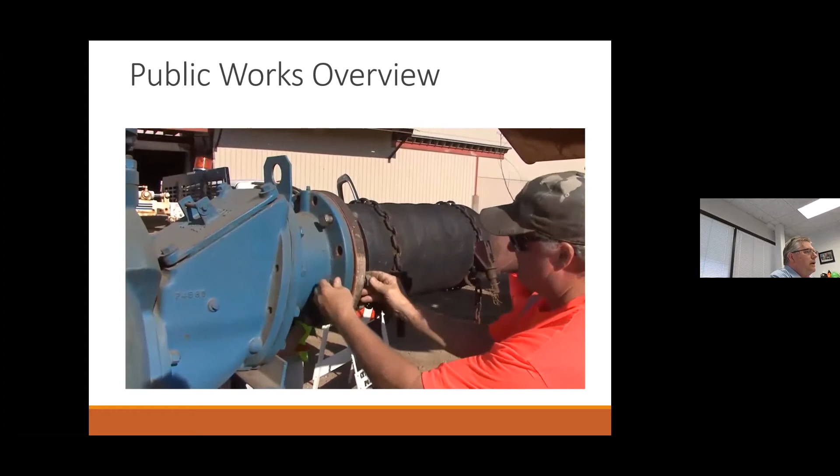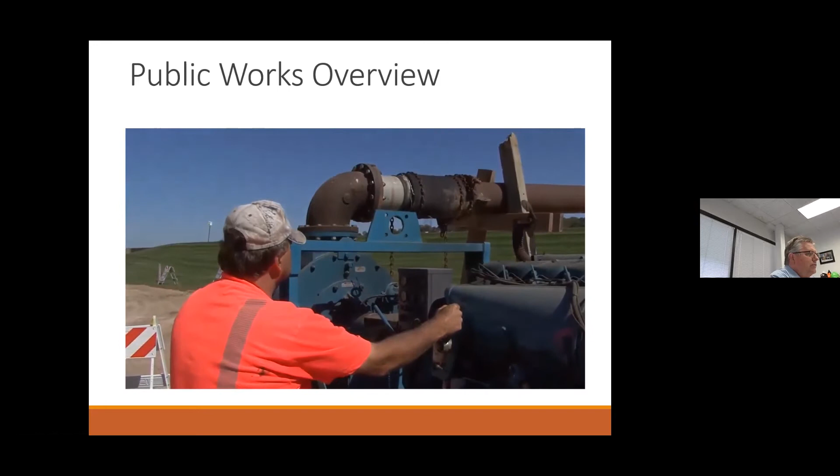Public Works Department provides the operation of the flood control system. There's 3 permanent pumping stations and 1 temporary pumping station. This was a demonstration project that we put together. We have over 20,000 feet of those temporary barriers, those HESCO barriers, available to us in case we would need to use those.

These are the ice harbor gates down in the Port of Dubuque.

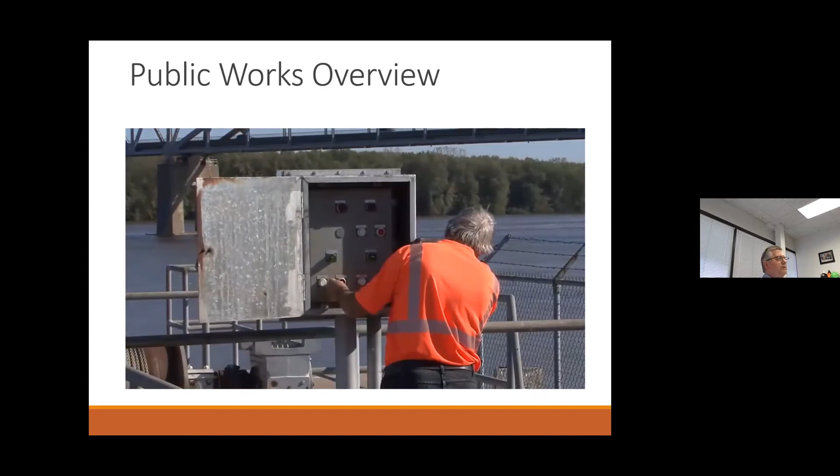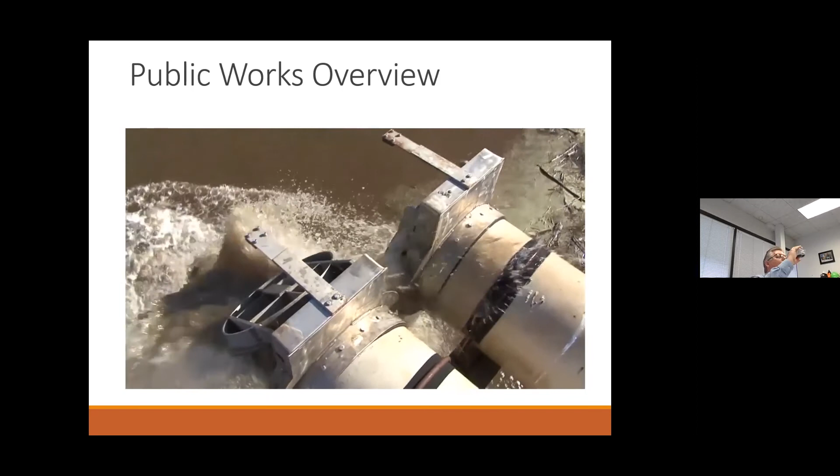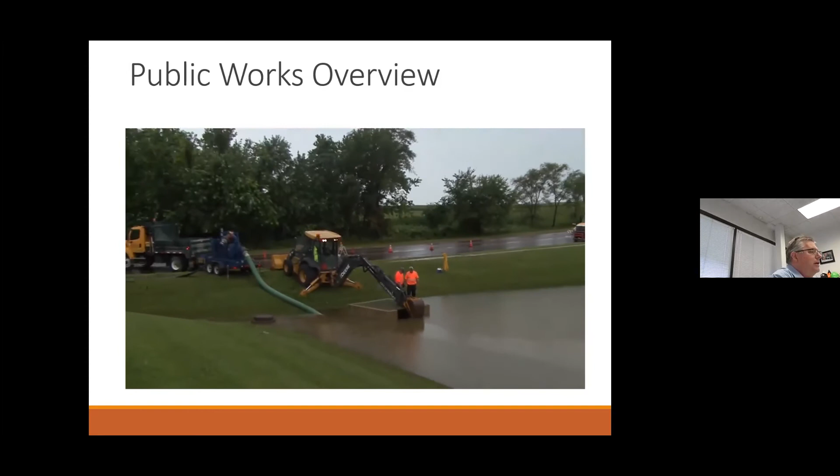We respond to all types of events. This one happens to be a summer storm event. Of course, we provide all the solid waste and maintain snow for both streets and some of the public-owned facilities.

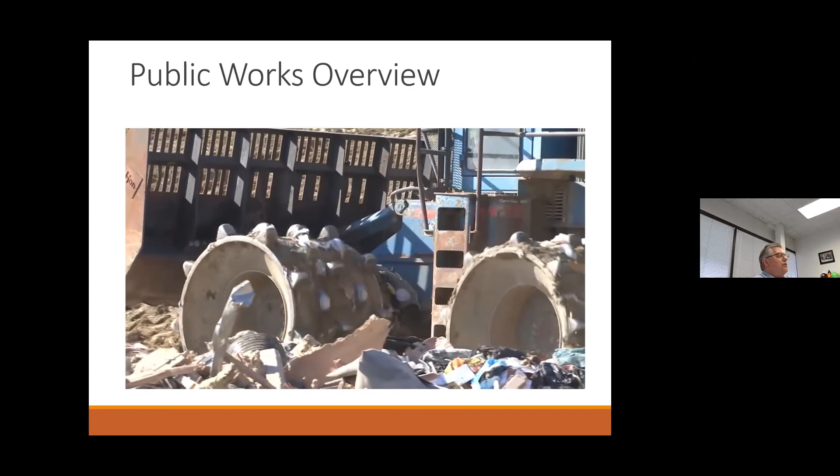This is a landfill operation. We have a gas collection system at the landfill.

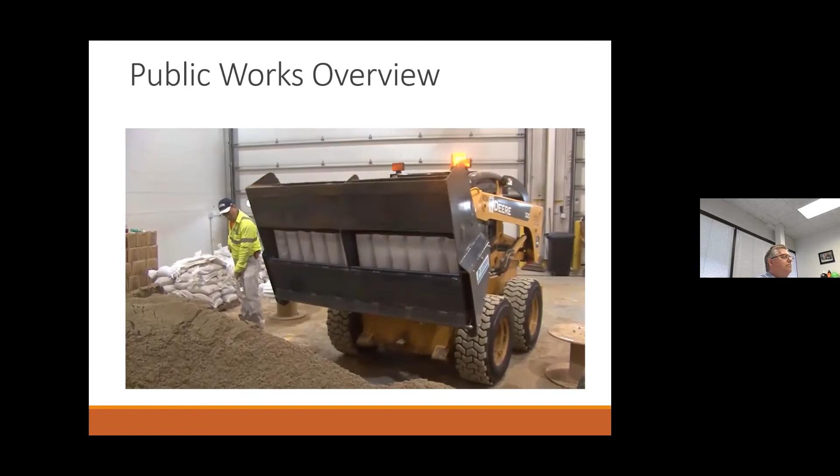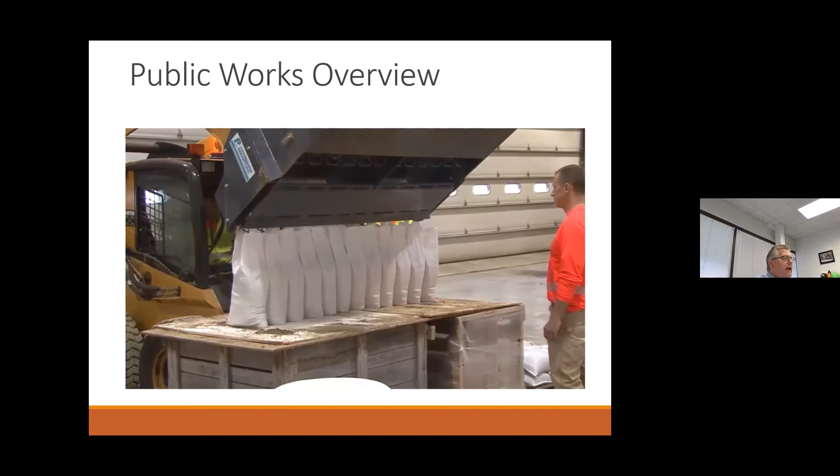We maintain both the street lighting, traffic signals, and the street lighting system, and the camera systems, which have grown to quite a lot here in the last few years.

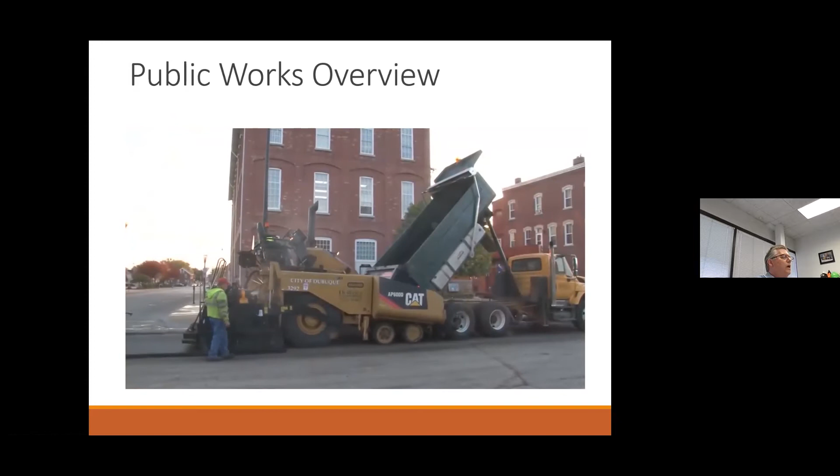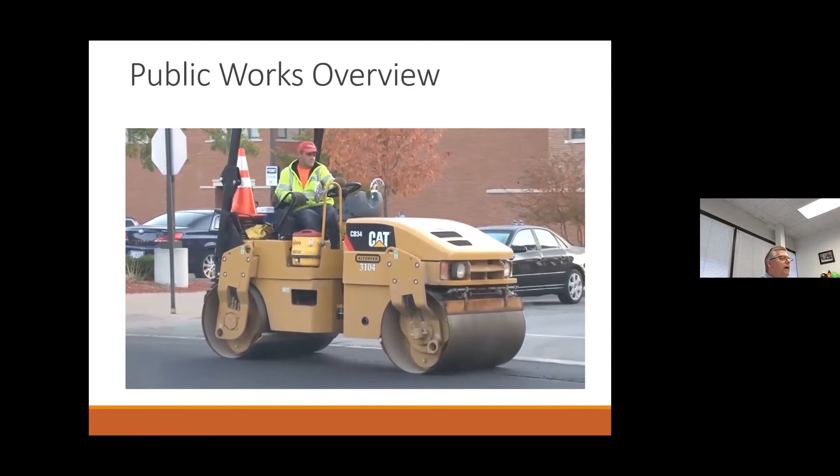We pave on an average over 7 miles a year. This year, it's going to be up to 10 miles, which is the goal for this year. Part of that paving also includes a replacement of corner handicap ramps and bringing those up to speed, up to the current standards.

We have full snow and ice control program: anti-icing, plowing, de-icing, and removal operations.

Well, I hope that gave you some background on some of the things that our people do out in the field each and every day to serve the community.

As we talked about earlier, we normally would meet here and we do a walk around at this time. So I'll take you on a walk through of what the facility itself looks like to help support the operations of the staff and Public Works Department itself.

It's a shared facility. Public Works Department and the Water Distribution Department also share a small section of this building. The building was constructed in 2005.

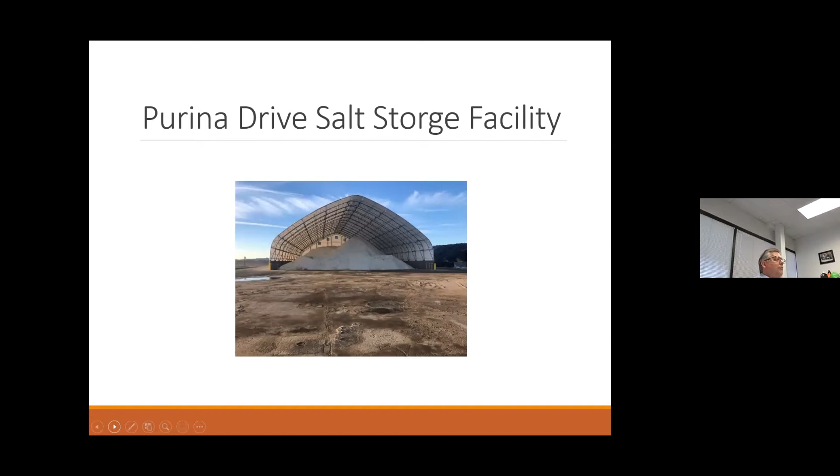This is the Purina Drive salt storage facility. This is where we'll bring it up on barges, unload it at the dock, and then it'll be placed in this facility until it's moved over to the facility we just showed, located at Kerper Court. This facility will hold about 15,000 tons, whereas the other one will hold about 1,500 tons.

What we like to do is have a 2-year supply of salt stored in this facility at the start of the year. We usually use about 5,000 tons average, a little bit less this year, more like 4,200 to 4,300 tons of salt used. We had less storms than average, 17 storm events, but we had almost 60 inches of snow, well above our average of 43 inches per year. So that means we had fewer events but greater accumulations, which I'm sure everybody remembers.

We also have a fuel island on site, across the street from the main facility. The small building in the back of the fuel island is the water distribution building. The water department sells bulk water, so contractors who need a lot of water on site, whether for boring or sawing, can buy water from the city and load it up here—anywhere from 500 gallons at a time up to a tanker load, about 7,000 gallons. So a wide range of trucks use that.